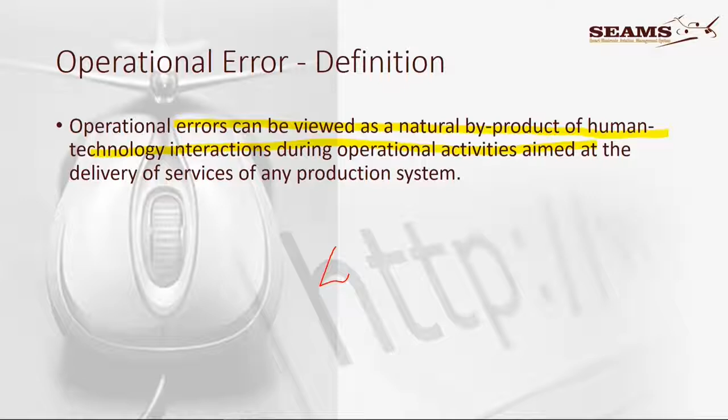Operational error can be viewed as a natural byproduct of human and technology interaction. Now remember that in the SHEL model, we had the liveware in the center, and we had software, hardware, environment, and then liveware. And the interfaces were happening between the center and each part.

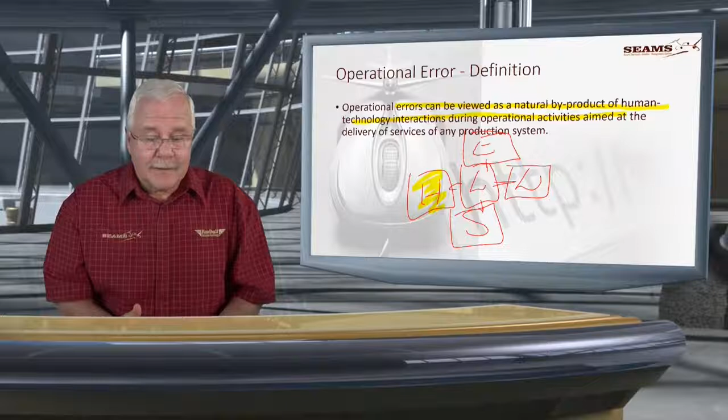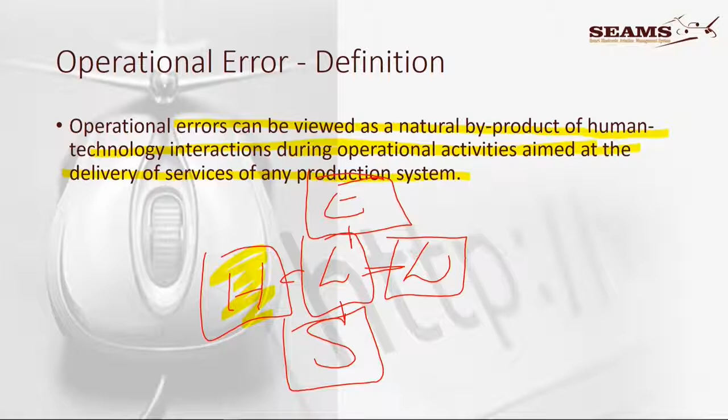In other words, whether that is a production system when we are going out to fly a sortie, or whether it's on the factory floor, it doesn't matter. It is when man and machine, or liveware and hardware, has to interface. And that, by the way, is the origin of human factors.

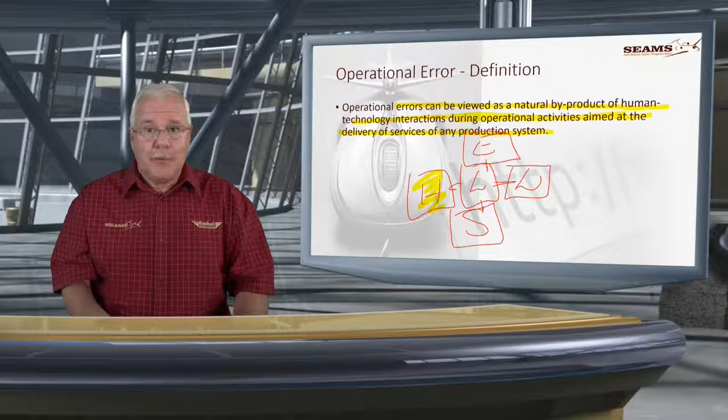That's where the term human factors was coined, when we said, okay, but why have we got this interface problem? And the only reason we've got that is because we're human. All right, at this stage, obviously saying that there's no other conceivable or technical reason.

So in both of those cases, error can come to the fore. Obviously, if there's a technical reason, it could be an error that happened before, poor, shoddy workmanship, or whatever. Or if, for some other reason, during final approach we don't check that we've got undercarriage, we don't select the undercarriage. And that's the kind of operational error that I would like to talk about today.

The nature of operational errors, just a couple of points: they are accepted as a normal component of any system where humans and technology interact, and operational safety strategies are put into practice to control the operational errors. Well, it says there that it's a normal component, and we've got to make peace with it.

All right. Nevertheless, mismatches in the interface, as with the SHEL model, and I've just done that. Tens of thousands of operational errors occur daily during the course of normal aviation operations. Okay, so we make a lot of mistakes. These operational errors are trapped by the built-in defenses in the aviation system, and their damaging potential is mitigated, thus preventing negative consequences. And this is quite important.

Right from the word go, what is it that in the aviation industry we do to ensure that once we've made an operational error, we can actually become aware? Or is there something that can catch that error, confine that error and limit the consequence of that error? And that's basically one of the things we have to talk about. In other words, control of operational errors takes place on a daily basis.

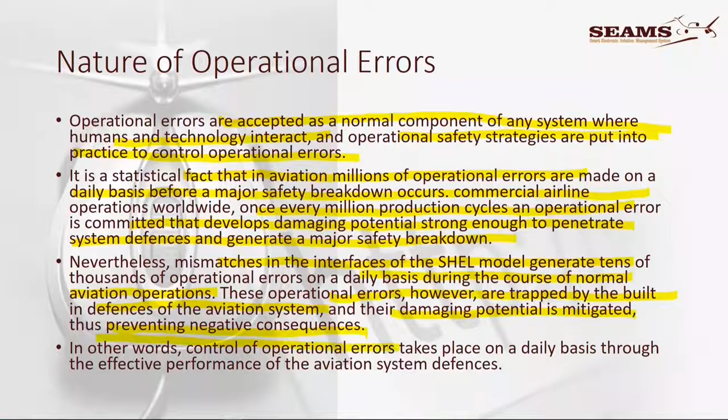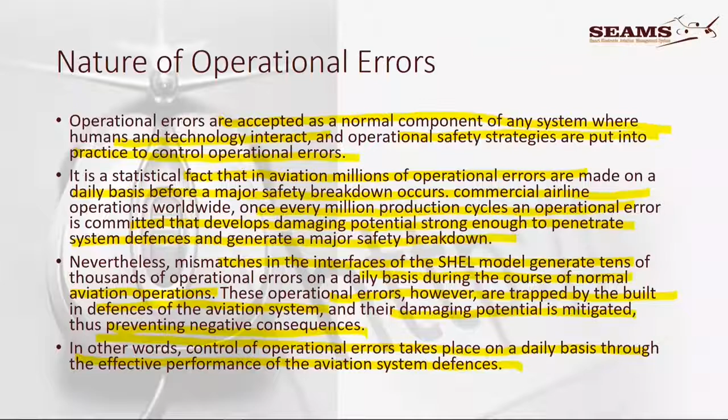Effective performance, obviously that will affect the defenses. Well, defenses are the one thing that we've got to

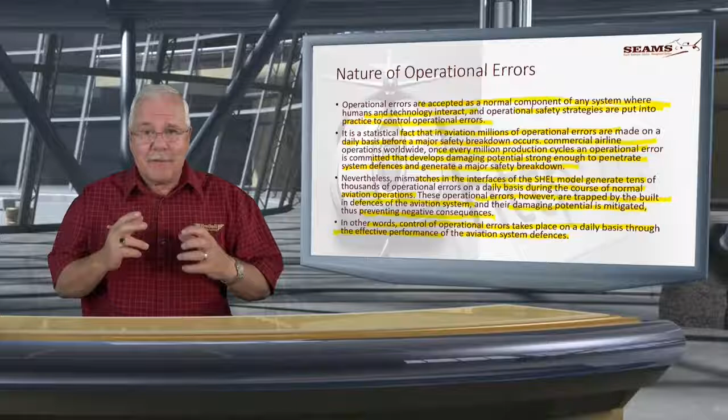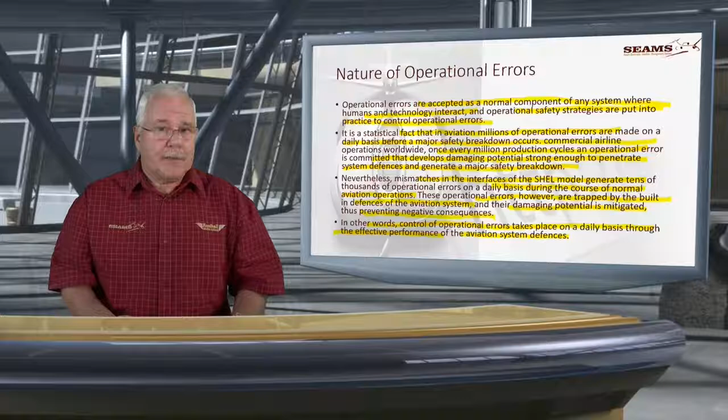Right, and then the last one that we're looking at here says, in other words, control of the operational errors takes place on a daily basis through the effective performance of the aviation system. Oh, that is a mouthful. It means that even though the system is effective and we've got the right stuff going, it is very difficult to have any flight operation or procedure without small errors creeping in. And this is what we want to talk about.

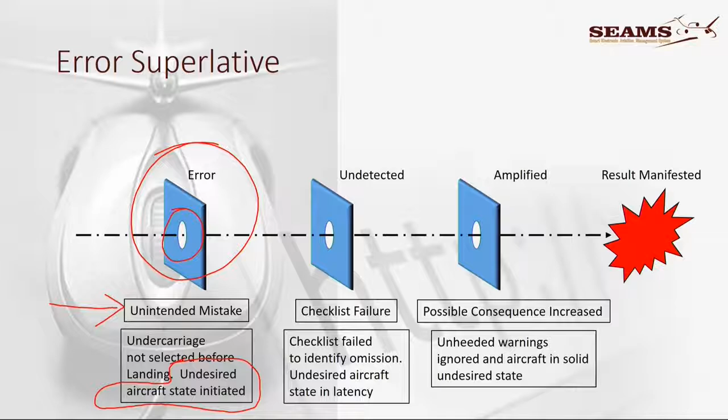Start off with the error. Now, the only reason that I've got a hole in the center there is to show that the error was not captured. In other words, there is an unintended mistake. It's not really a transgression. We just forgot to put the undercarriage down, okay? Give me a break. Undercarriage not selected before landing, and that put the aircraft into an undesired state. The undesirable state of the aircraft is now initiated.

Right, so you're sitting on downwind. For some or other reason, you got distracted. I don't know what you were doing, but you just simply didn't select the undercarriage down. You did the rest of the power settings. You put the flaps down. You did everything. You didn't notice that the aircraft was performing a little bit better than normal, because you didn't notice that the less drag of the wheels actually made an inch or two manifold pressure difference.

You didn't notice that it made a speed difference, and you didn't notice that you actually used less power. In other words, you are now totally unaware.

Remember, the moment the error is made, it goes into a latency state. It's lying there dormant, not shouting at you yet. Because you didn't select the undercarriage down, didn't check for the green light, and didn't check for the mechanical indication, or outside in the Baron's case, the little mirror on the wing showing if the nose gear is out. By the way, all these things are taught.

But somehow, for some reason, everything slipped past us. You'll say to me, is that possible? Well, unfortunately, once you've taken somebody's mind and bent it and captured it to a certain level, the peripherals don't really matter anymore, because you become so focused on that one specific thing. And this is obviously one of the key problems.

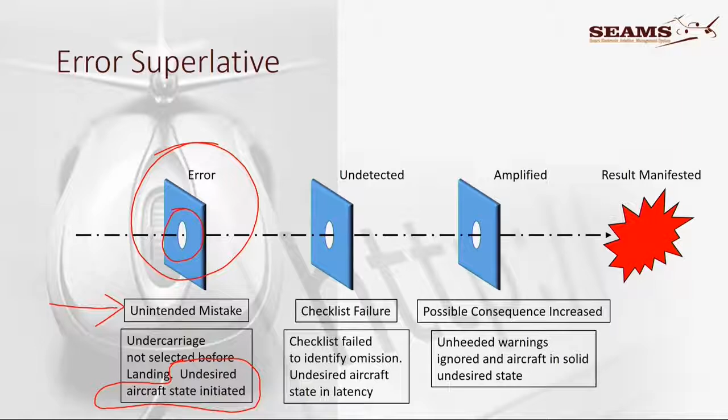The next thing is the error is now undetected. How do we detect errors? Well, here you can look. I said checklist failure. Remember, we use checklists, SOPs, not little rhymes. We've got sequences of doing things, and we hammer it into our heads every day.

Every time we fly, this is what you do. On downwind, the first thing is your radio call. Next, you set the power. Next, brakes, undercarriage down, and wait for it - cloop, cloop, cloop, three greens we've got. Check: outside indication, green light, mechanical indication. And now you carry on setting the mixture, the pitch, the throttle for the condition. So there's an absolute sequence that we follow.

It's not a sequence we follow maybe now and then. Flying does not work like that. The moment you fly and don't follow the absolute sequence anymore, you're looking for trouble.

What makes you so good?

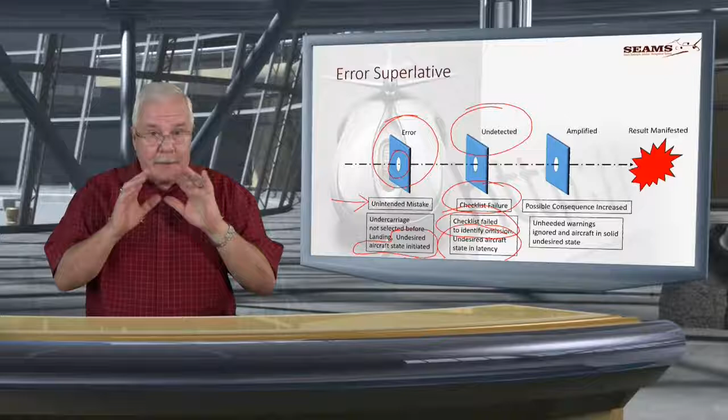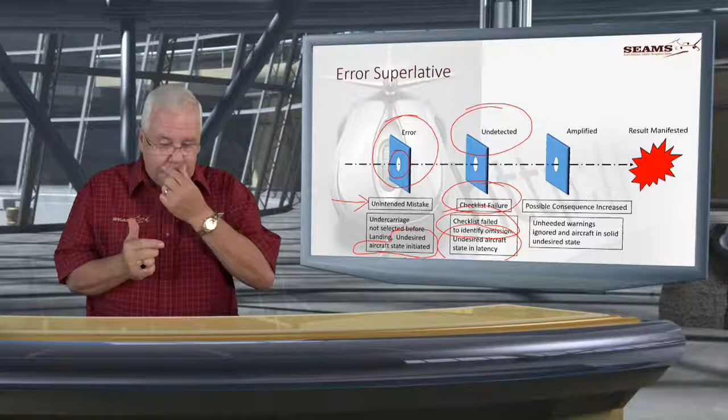Well, all right, never mind. Checklist failed - in other words, if we didn't use it, now the aircraft is definitely in an undesired state, getting into the latency state. It's now there. The first time you made the error, the second time you compounded the error by not picking it up due to the correct procedures, and then the next step, you amplified the problem. What is that? They say there's a possible consequence that is increased. Whoa, how is that possible?

You talk here about unheeded warnings. Now it simply means a warning came into the cockpit. For instance, the red light showing for the undercarriage is an unheeded warning because we didn't pick it up, and the warning is there. Maybe the undercarriage horn is blowing, but you are so distracted that you actually don't hear it, and don't even think for a moment that you were created above that kind of mistake.

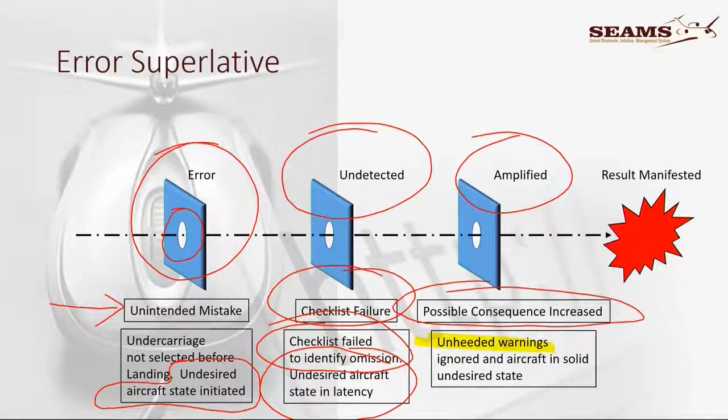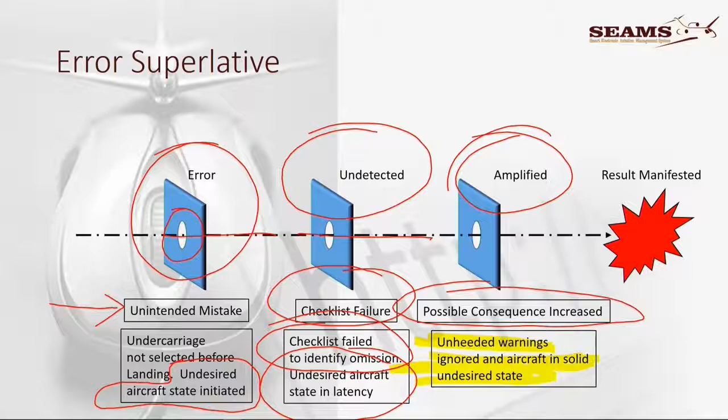It's simply not true. It is easy to distract someone to the point where, in their peripherals, they don't see or hear, because they're so focused on what seems important at that moment. So I said it's ignored, and the aircraft is now in a solid, undesired state. Still, if you look right through, it popped through that hole, it didn't stop there, and the things that could have stopped it actually compounded the problem even further. There's now a certain amount of inevitability to this.

We are now on final approach. We do not see that there's anything wrong. It is undetected, and on we go, and it's now amplified to the level where, remember, at this stage of the game, there's been no consequence yet in terms of flight safety. On downwind, on base leg, on final, the problem is still there until you're going to make contact with Mother Earth.

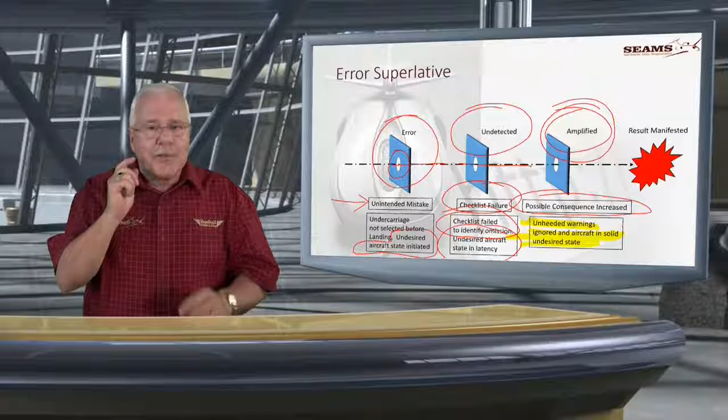So now we just hope and pray that somebody's going to pick up that the undercarriage is definitely not down. I'm not one of the guys listening to the clips on YouTube where you can hear the hooter screaming, but both people are so mesmerized by something that they don't see where they're heading.

All right, if we look at reasons for the error induction, this is where we've got to pay attention, because this is exactly the problem and how it's going to be. Distracted attention - and I can tell you now that distracted attention is the number one cause.

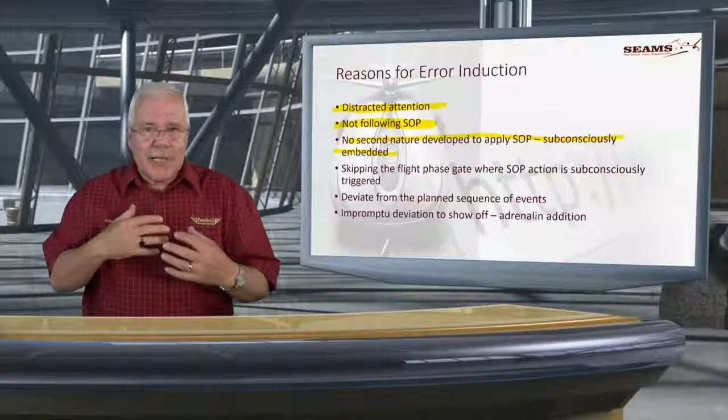Not following the SOP - a lot of people say, what, the guys don't follow the SOP? Well, it's probably not that they really don't want to follow it, but it's not become second nature. No second nature development. There's no subconsciousness embedded that will take over automatically.

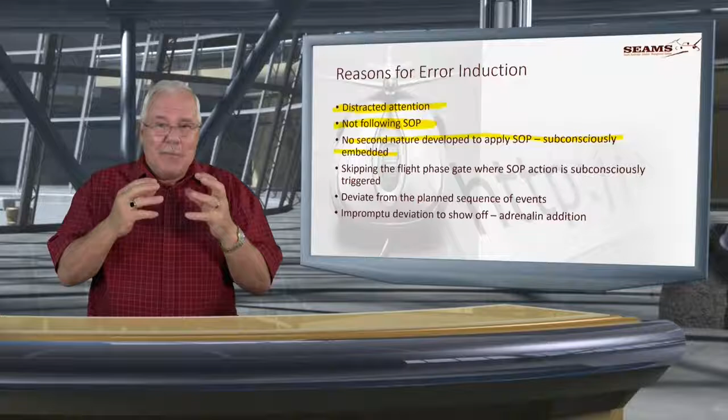Even today in the Harvard, if you wanted to, after takeoff, get the undercarriage up, you would apply the brakes, and then you would have to energize - push down a lever to energize, to get hydraulics into the system, and then undercarriage up. So even today, when I sit there after takeoff, brakes, energize, undercarriage, I say energize - where does it come from? It's 1,800 hours on the Harvard that ingrained that into me, and it's difficult for me after takeoff not to say energize. It's just ingrained.

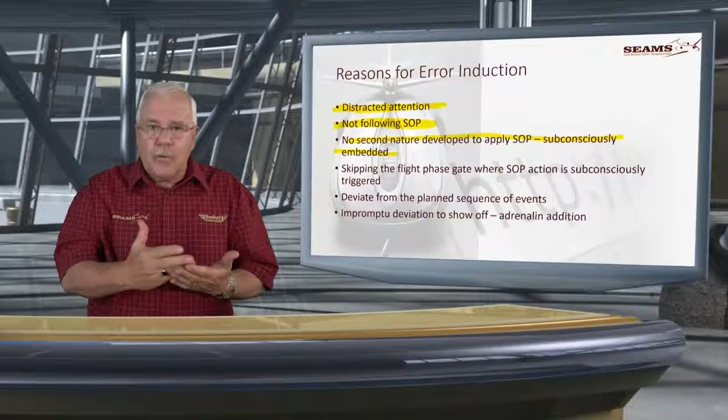Now imagine, this luckily is something that's extra, that's ingrained as a single pilot. In a multi-crew, we do call-outs, we do checks, and we don't let it run just off memory. But in this case, memory is what is happening.

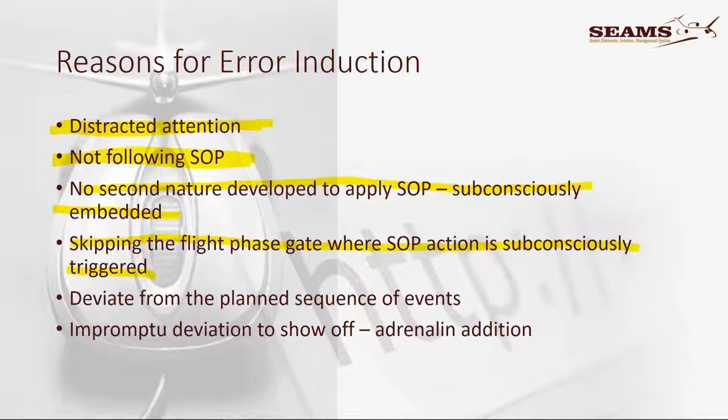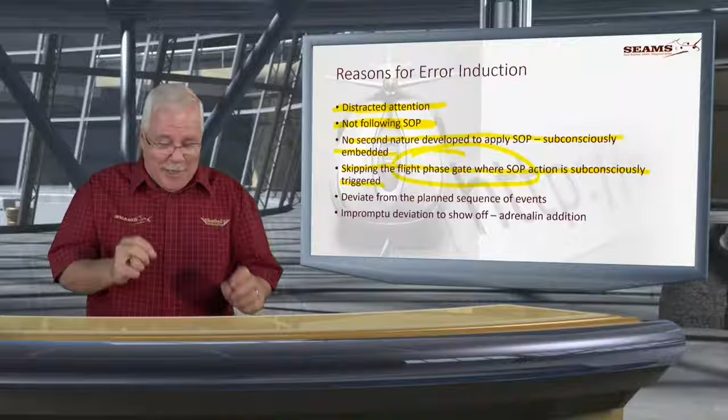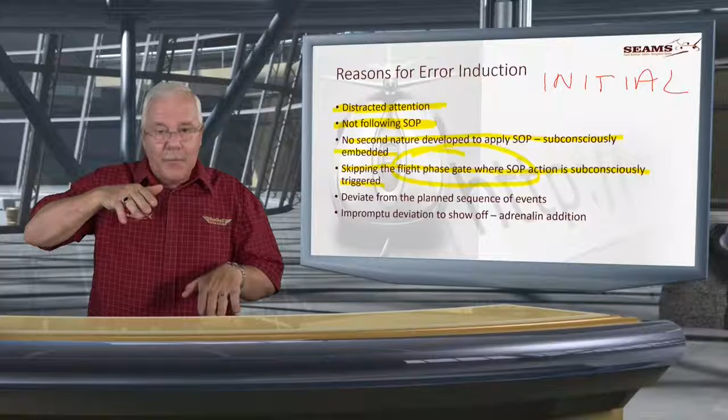Skipping the flight phase - okay, now what is the flight phase gate? When we approach an aircraft to a runway to land, there are normally 3 places that we join. Obviously there can be others as well, but let's make it 3 for now. The first one I will say to you is the initial. Now what is an initial? An initial joining is when you join overhead at 2,000 feet above the ground. You check out what the runways in use are, and from there you then descend and join the circuit.

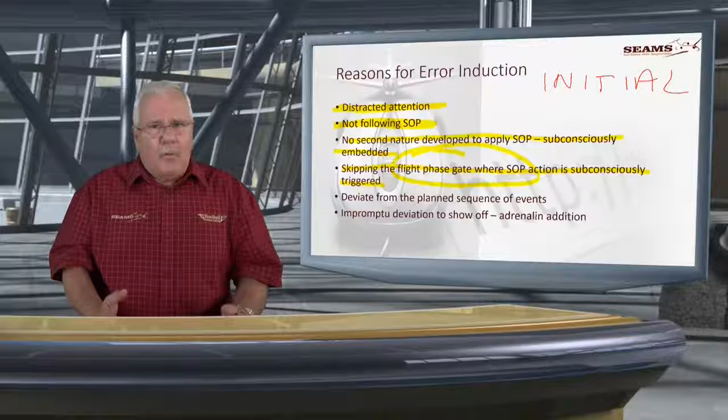And the initial - initial is not something that we use anymore. Well, but what is the unmanned procedure anything else than actually flying an initial? You're flying overhead, checking what it is, and then joining into the procedure.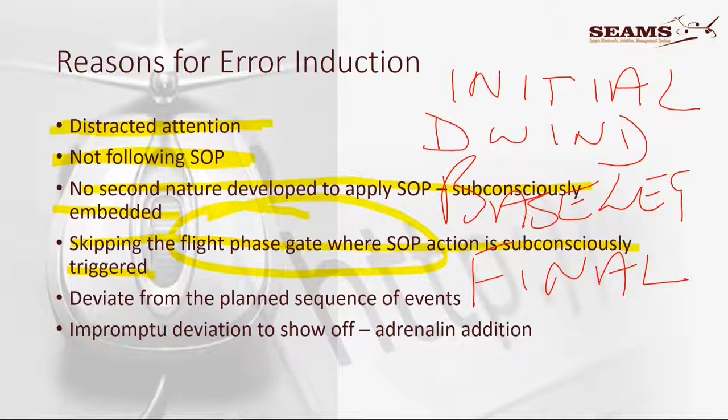All right, so there's the initial, there's downwind that you can join, there is base leg that you can join, and there's the final approach. Now the initial, the downwind, and the final, those are pretty normal for people to join in those different places. The thing in your mind is, when you join to land and you're in a certain place, something just pops up naturally to say, right, and you start your radio call. Where am I? And immediately the radio call triggers the brakes on and off, undercarriage selection down, stand by and wait, and you follow through the procedure. But there is that trigger.

Where is that gate? Now, when we fly in the school environment, or when you fly in a controlled airspace environment, then normally you will join a downwind. And in an unmanned procedure, you'll probably join overhead, and then put yourself on a downwind. So downwind in both these cases, they're there. But many times, in an airline, or under normal circumstances, we're not going to fly a downwind and a base leg onto final if the flight path is actually taking us straight onto final.

Because time is money, we get used to the fact that we're joining a downwind all the time. And all of a sudden, we're not called to do a downwind joining, but a final, straight-in approach. Oopsie. Now there's a different flight gate. The flight gate is not initiated by a downwind, because it does not exist.

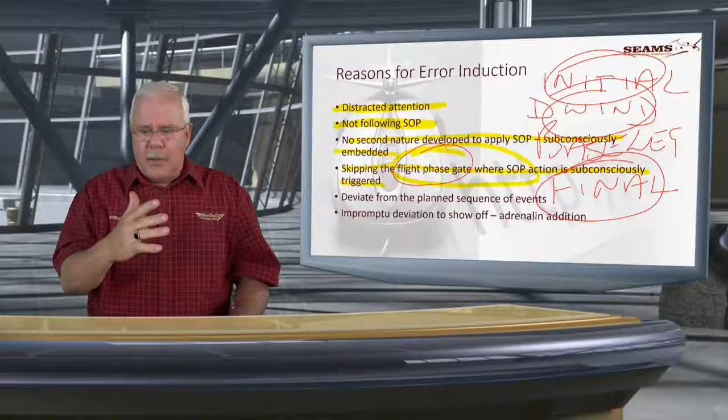So can you approach in different places? Yes, of course, it's not a problem. But it doesn't matter the time - that gate must trigger so that you do the right things at the right time.

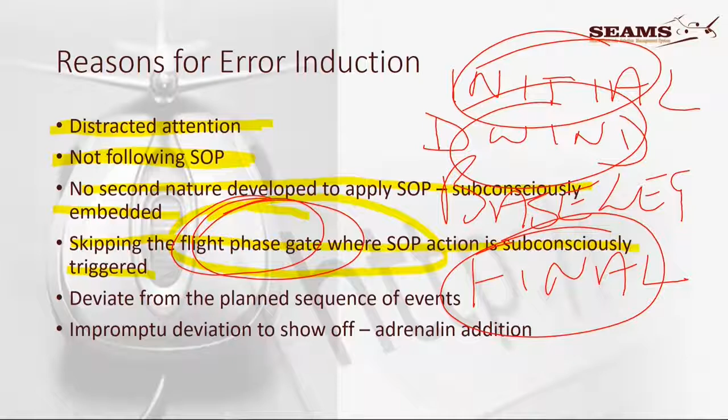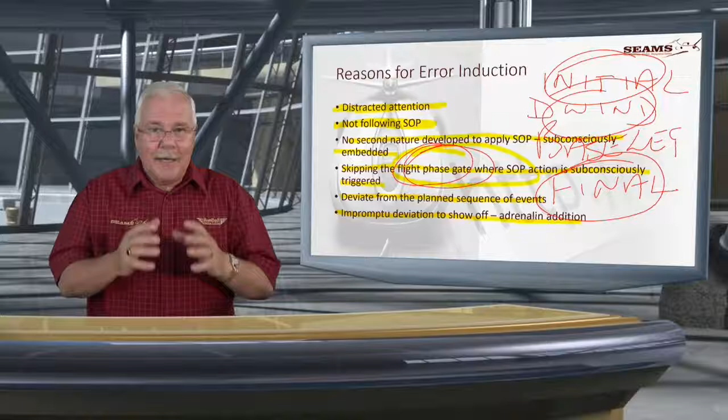Then I said here: deviate from the planned sequence of events, and the impromptu deviations for an adrenaline kick. The moment you think, I'm going to do a shoot-up and just be the man, your heart starts to pump, there's adrenaline pumping into your veins. And what happens to that adrenaline? Well, let me tell you, it makes you stronger, but it is overwhelming you, because there's nothing that can happen to that energy except to turn into some kind of toxin inside.

Because you can't quickly run out of the way. But as you say, okay, we're going to do a shoot-up, the heart is starting to pump, everything is - the excitement is growing, and now you're going in. As you go in for the shoot-up, that is when you actually become deaf and blind to anything in the peripheral. That is what unplanned stuff does to you.

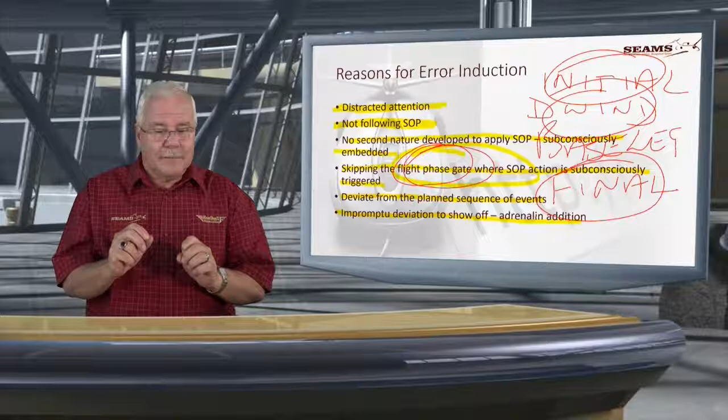Okay, that's just something - I don't want everybody to go and cut the engines now. Error capturing, let's have a look at that.

Man and machine interface needs help to avoid the mismatch, and there's three of them. The first one is technology, standard operating procedures, and training. And you'll say to me, Charlie, but you're repeating it all the time. Well, look, we make the errors, and we've got technology, and we start trusting in stuff so that eventually it is the machine that must do the procedures, and we just become a sort of innocent passenger. Well, if you pilot on your own, you can't become an innocent passenger, because it just doesn't fit the picture.

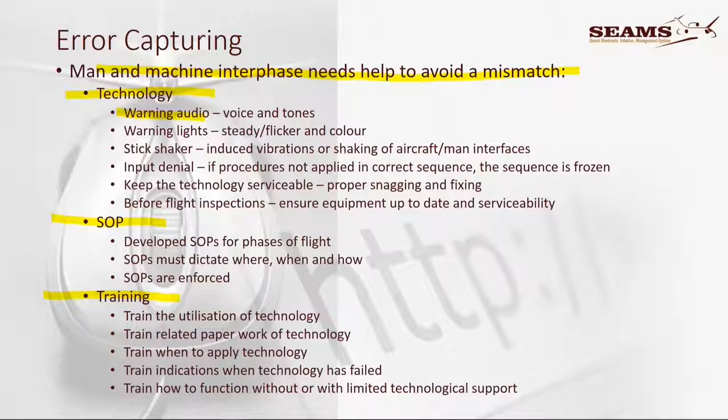But let's have a look here. Technology: there's an audio system, normally voices or tones, warning lights, steady flicker or color, stick shakers, input denial. This is one of the things that happens - if you're out of sequence, the system just won't accept the next step. It is like if you select the flaps down above a certain speed, some aircraft would have the equipment to say, okay, speed is too high, flaps will not come out, and as the speed bleeds below the flap maximum speed, the flaps will start deploying.

That's an old trick for the fighter guys - they whip down the flaps, they know nothing is going to happen, and as they come down below the limit, the flaps start deploying. Okay, so there are those things. It's not to say they're always going to work.

Here is the thing - you must keep, you know what? Yeah, I've got to get a red pen. Keep your technology serviceable. Snag and fix, snag and fix. Listen, you cannot decide after a sortie not to write up the technology problems, failures, or whatever.

If the undercarriage horn is broken, there is nothing to amplify the bad situation, and therefore the actual error is being amplified. Not an attention grabber. It now turns against you. So by not properly snagging, let's say, the undercarriage hooter, all that you're doing is waiting for a place where you're going to end up with no undercarriage warning system, and if you get into that system, the inevitable

must happen. Remember that we're saying that last one is where we need to pick up something, because we cannot get into an undesired state. We don't want to be there. Well, if this thing doesn't work, it's not going to help you anymore. It's like the undercarriage lights. How do you know the undercarriage is down?

How do you know how much fuel you've got on board? No, I checked. Well, did you get a leak? And I don't know. All right? The fact is, that is why we snag stuff. And that's why we fix stuff. All right. And then I say here, before flight inspections, ensure equipment up to date and serviceability, and.

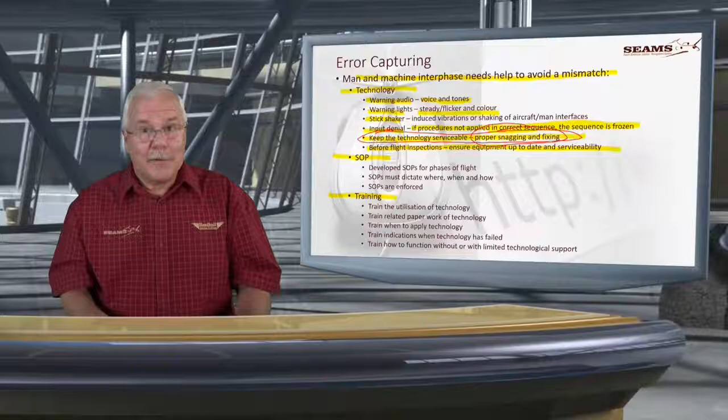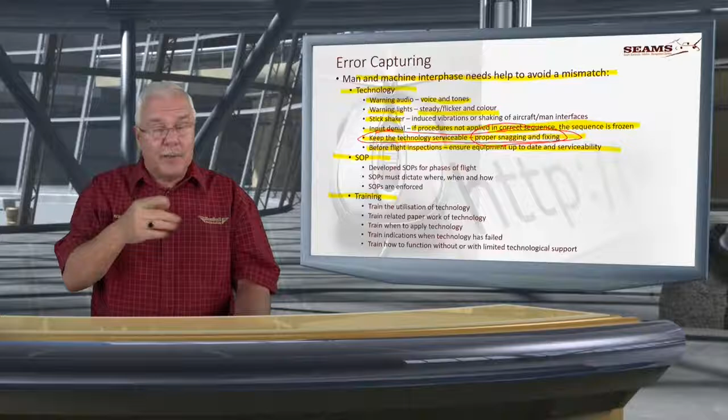By the way, that's why we do afterflights. And don't think if you pick up on an afterflight that there's something wrong, the next guys won't pick it up on the pre-flight. You're just damn lucky if they don't. All right, then it's going to be blamed on you because you're the next one that's going to fly. A little bit of a problem, eh?

SOPs. Now, the capturing we've got through technology, but remember now we need SOPs. SOPs must be developed for the phases of flight. It must dictate what, where, when, and how, and the SOP must be enforced. Now, I just want to put this here, because who enforces the SOP? Really, am I sitting there every sortie looking over your shoulder, what are you doing? Oh, come on, I haven't got time for that.

Eventually, you're going to have to be on your own. And if you cannot enforce doing the right thing by yourself, you just became another rogue aviator, all right? And you will pay for it. I promise you. Few to no people walk away. There are certain things that, look, when we teach people how to interface with machine, why do we do procedures? It is to avoid interface errors.

Why do we do procedures on base leg again? To check up if we did the downwind. Why do we redo the final checks? To check that we've got the undercarriage, we've got the flap and everything. Why? Because we're following the SOP. We check it. What is that to do? That is to capture. But if you do not follow it, the SOP cannot help you. It cannot help you. It's meaningless because it's something on a piece of paper.

I can give you the piece of paper. I can teach you to use the piece of paper, but I cannot force you to use the piece of paper. Training. Train utilization of technology, train-related paperwork of technology. When do we apply the technology? Indications when the technology has failed, how to function without or with limited technological support.

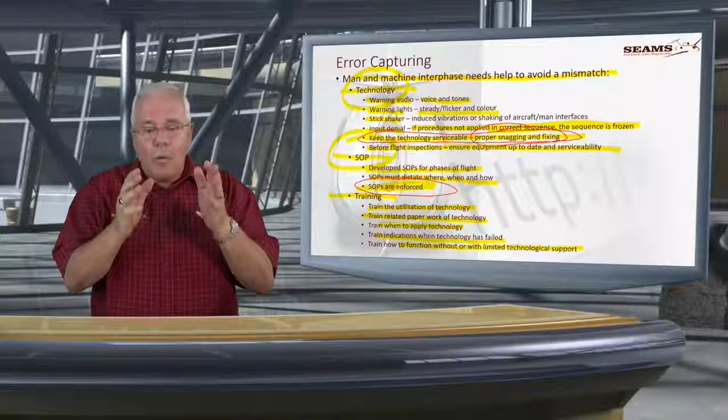So if I haven't got undercarriage down, it will mean that the power settings that I'm used to will now be too much for the normal speeds. There's a deviation. So I need you to get into the cockpit and start observing exactly, if you fly the same type of aircraft all the time, if I set this power setting, what speed do I get under certain configurations? This with flap down, this with undercarriage down.

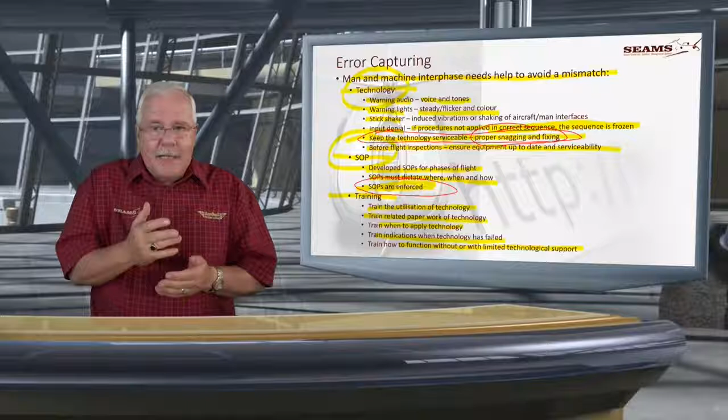What is it that we get? And then we use that as a baseline. The moment that we know, in other words, we've got pre-knowledge, we say, hey, this is strange.

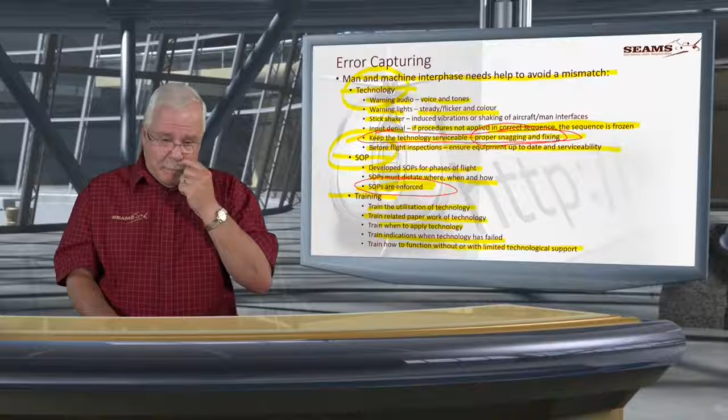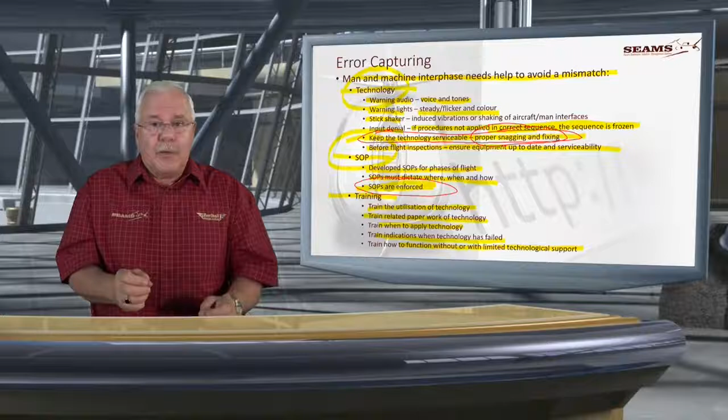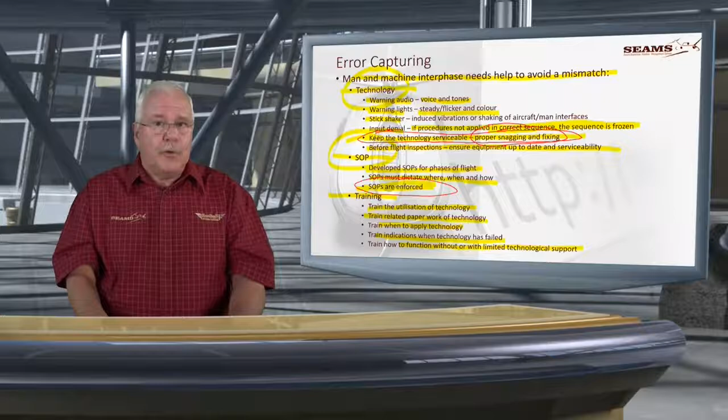Normally, I need 22 to 23 inches to maintain, let's say, 90 or 85 miles per hour. But all of a sudden I see, oh, I only need 20 inches, or whatever the case might be. That is where we've got the problem. All of a sudden we need less. Then there's something different, because the drag that you have got at that moment in time will automatically determine how much you actually need at the end of the day. How much power.

Just to come a little bit more to a positive there, next we're going to have a look at the antidotes. As I've said, first of all, remember that there was the error phase, then there was the undetected because of the checklist failures, and then the amplification by not looking and not being able to pick up that we had warnings. So unintended, checklist failure, and the consequence is now increased, or the possibility of the consequence has increased, whichever way.

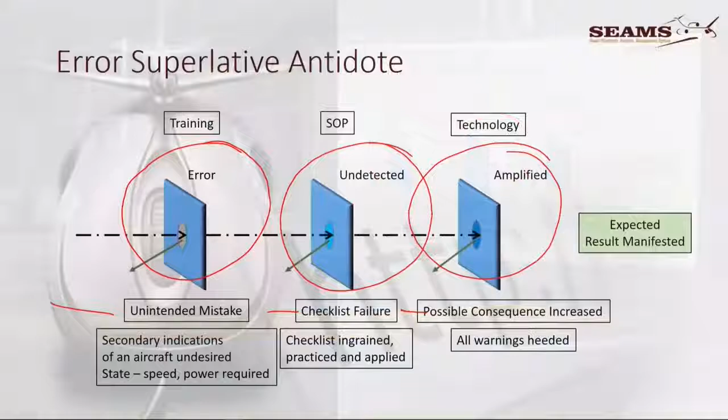All right, so now remember the antidotes that we're looking at: the secondary indications of an aircraft undesired state, such as speed and power required. I've said quite a bit of that now. If these secondary indications trigger that to you, then obviously it'll bounce away and the sequence will stop there. But let's say it slips through, but now you get the checklist. It's ingrained, it's practiced, it's applied. And if you now apply it, you pick up, oh my goodness, I haven't got undercarriage, whip it down, and everything stops there.

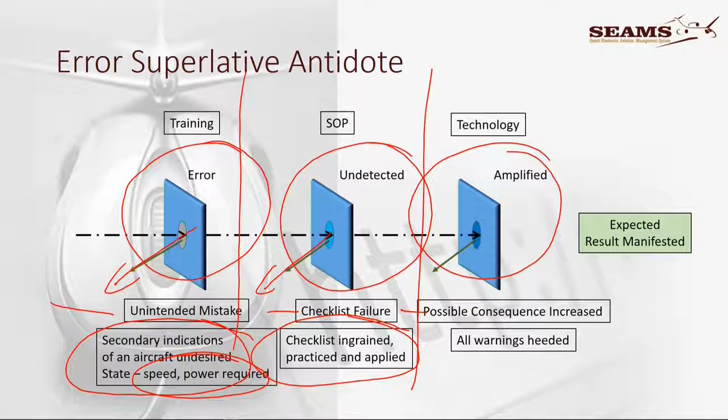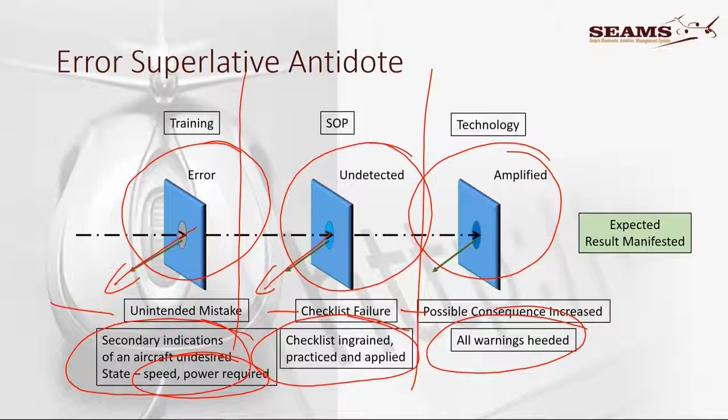Now, the last case here that we're talking about is where we say, all right, that hooter that I snagged and is fixed now, that hooter started blaring in my ears and the red light shone in my eyes. And I heed the warnings. And it stops there, and the result is as expected, a good end result. Is it really as easy as that? Because remember, here I say, you've got to train, you've got to work your SOPs, and you've got to have your technology.

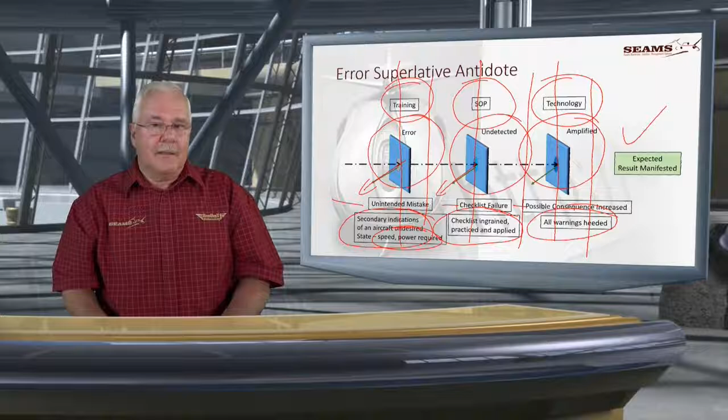Now, where the technology is going to come in is here. The SOPs will come here, but the error capturing skills are under the training. It's in this case. All right, this thing is so full of blobs here, so I can just do that and voila, it's ready again. So technology, but if technology fails you, then you can't go beyond that point. So now all of a sudden the SOP is actually the only key here between the error and the expected end result. It's the SOP.

Yeah, but we haven't got SOPs. Then make SOPs. Yeah, but this. Stop yeah-butting. All right? The fact is, get your SOPs triggered, do the SOP, because that is what saves the day. How do we get that ingrained? We learn, we teach, we enforce, and then we wean you, and at the end of the day, we leave you. And then, hopefully, you're not going to screw it up.

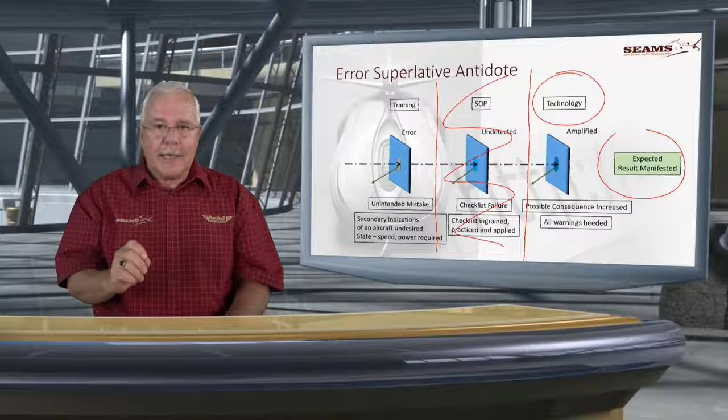But what will lead you to disaster is to not follow the recipe. If you want the same chocolate cake, you must use the same recipe every time. You cannot get into the madness loop of changing the ingredients and hoping every time to get exactly the same end result. Or, alternately, as our clever, learned friend who discovered E equals MC squared said, you have the same ingredients, but you expect a different result. It's not how it works.

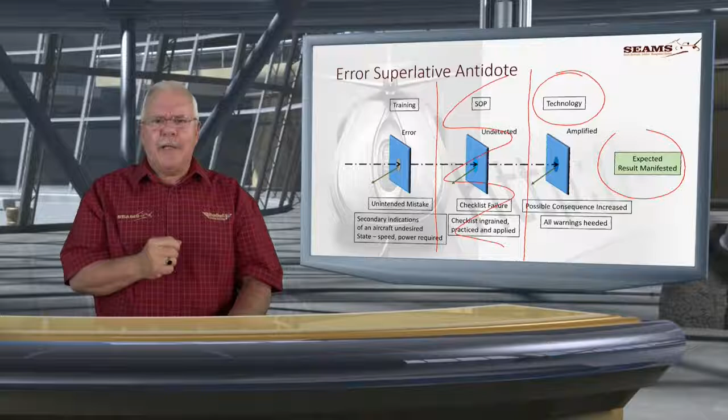Ingredients equals results. Period. Yeah, but I'm better than you. It's got nothing to do with you and I. Whether you're better than me, that's fine. I accept it. You're better than me. But none of us are bigger than the moment or the SOP at that specific point in time.

Oh, okay. And there in the back, I think I recognize Leonard Hawkins there.

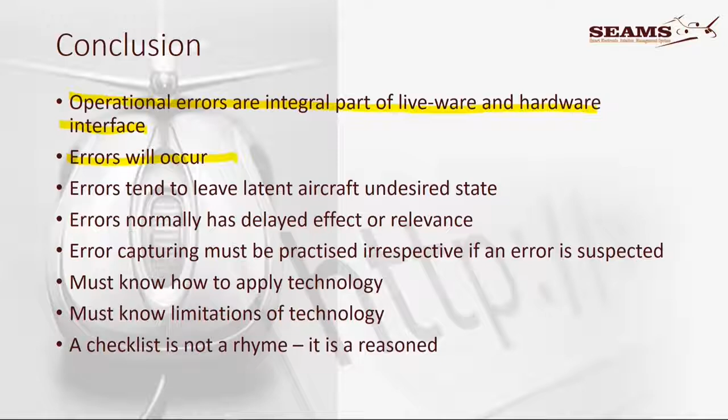Conclusion. All right, let me get it here. Operational errors are an integral part. We now know that. Errors will occur. Errors tend to leave latent aircraft undesired states. That is a fact. Up to now, you make an error. It's an honest mistake. It's going to happen. It's just the natural world that we've got to interface with, and we're going to end up in an undesired state.

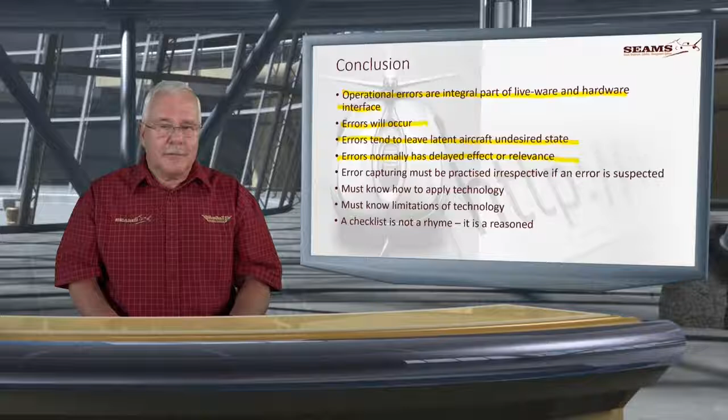The next reality is that the error normally has a delayed effect, or its relevance is delayed. It's not to say that it's going to happen right now. If I don't put the undercarriage down, nothing's going to happen right now. It's going to happen by the time you get to a height lower than where the undercarriage normally would have touched the ground. Not much lower. Then the prop is going to start eating. Okay? So, error capturing. And that is why up to that point, that will happen. That is bound to happen. No amount of training can basically stop that.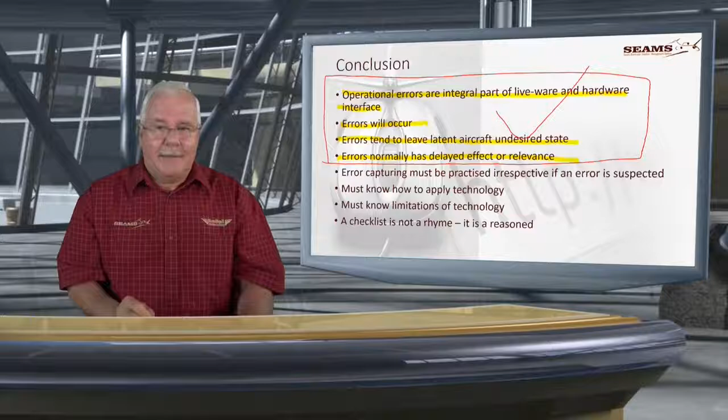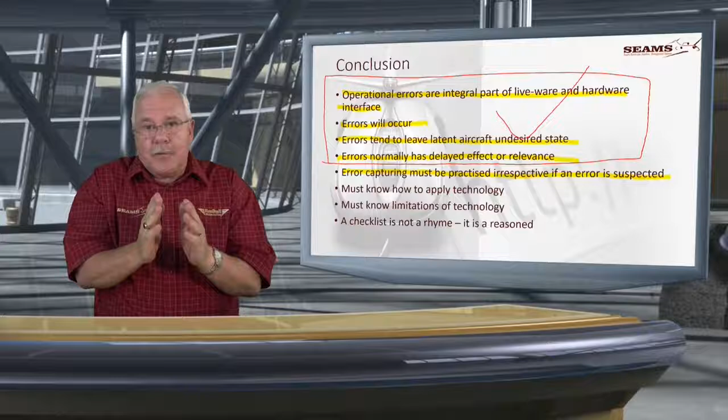But how we capture our errors and how we become aware of our errors, that is the key. All right, so let's look at error capturing. And there it says, must be practiced irrespective. So whether you suspect an error or not, you do the error capturing. And error capturing is the easiest if it's from non-technological, and remember technological we said is the last phase, the error is the first phase, and in the center we've got the thing that can help us to make it or not make it: the SOP. I think by now you should start getting that sort of understanding.

All right, then must know how to apply, must know the limitations of the technology, and here, I just want to put this in red again: the checklist is not a rhyme. It is a reasoned response. It's a reasoned barrier between error and fatality. Well, eventuality. It doesn't have to be fatal. But the thing that protects us in the center.

So yes, we can put in all the technology in the world. So you had the best radio altimeter, but you were never taught how to use it. You were never taught what the standard operating procedures were for utilizing the radio altimeter, and when and where and how to utilize it. So when you started doing your low flying over the dams, you touched the water and that was the end, and now you are dead. And now everybody has got one hell of a problem, and all I say to them is, guys, remember, there's a reasoning behind this. You must know how it works, when to work.

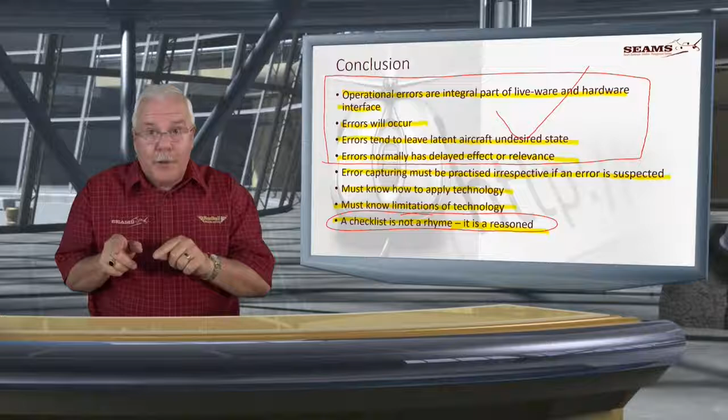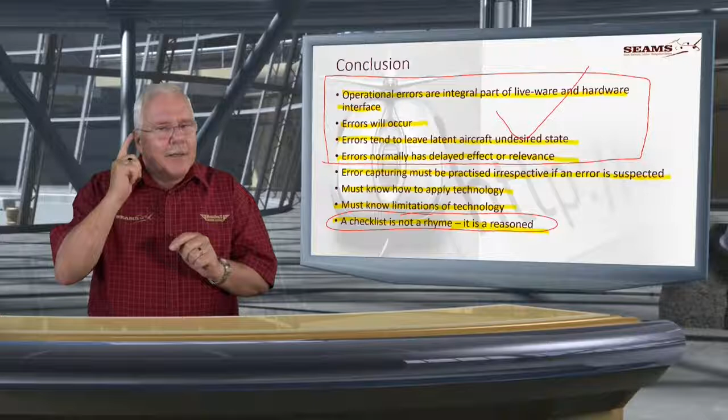So we've got the technology, but before we can use it, we must be capable. We can't just be capable in each and any or every way. We must be capable to use it according to a specification. Listen now. You can't wait to say if all else fails, then you are going to fail. Because in flying, it's not then the time to discover, oh my goodness, maybe I should have. Those are normally the last things that might go through your mind before something else goes through your mind in a quite gruesome manner. All right.

Am I trying to put this operational thing and the error in a negative phase? No. Get used to it. The operational error, the interface error between man and machine, the interface error between liveware and hardware is going to be there. Period. Get used to it. Suck it up. I nearly said use it or lose it. I don't want you to lose it, because that's why we're talking to each other. But this must trigger your mind to say, all right, now we know the errors, and how do we capture errors? How do we oversee ourselves?

And the primary one will be the SOP. If you follow the SOPs, you'll also find that your technology will help you in a big way. But if you do not use the SOP and you solely rely on the technology, you might get a nasty surprise. Now, the whole idea about flight safety is not to scare the whatever out of you. The idea of flight safety is for us to get into a place where we can actually enjoy flying.